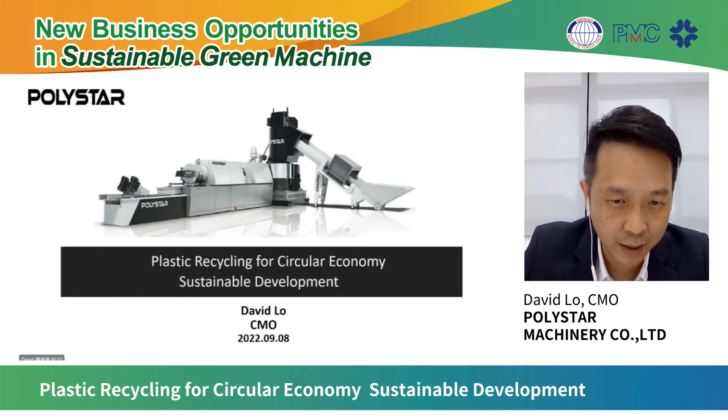Polystar was established in 1988. So far we have 65 employees, and our main products are recycling machines and blow film extrusion lines. So far, we have distributed about 3,200 sets of blow film lines and 1,200 sets of recycling machines. We have distributed to more than 110 countries worldwide.

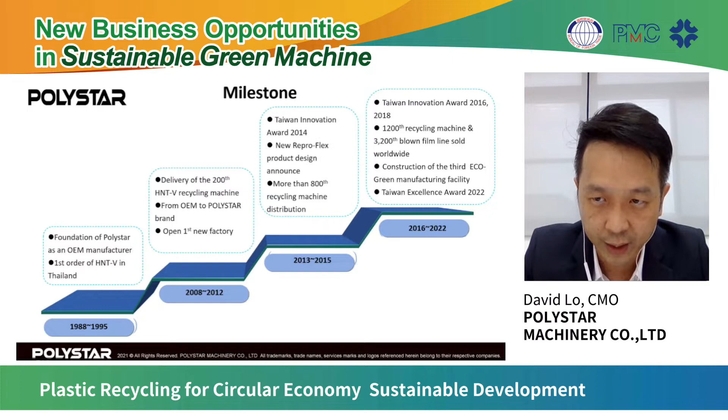From 1988, Polystar was positioned as an OEM manufacturer. From the 2010s, we moved from OEM to Polystar branding company. Until now, we have already developed innovative plastic recycling solutions and blow film extrusion line products. We have constructed our third eco green manufacturing factory in Tainan. In 2022, we even acquired the Taiwan Excellence Award and got affirmation from our global customers.

Today I would like to show some topics, including the green and smart manufacturing of Polystar. Our mission is to make recycling more simple and efficient, using less energy consumption and less operation cost to contribute more value to the circular economy. Our mission is to contribute value to the circular economy chains.

Here I would like to show one video to present how we work in the circular economy chains. Please see our operation video.

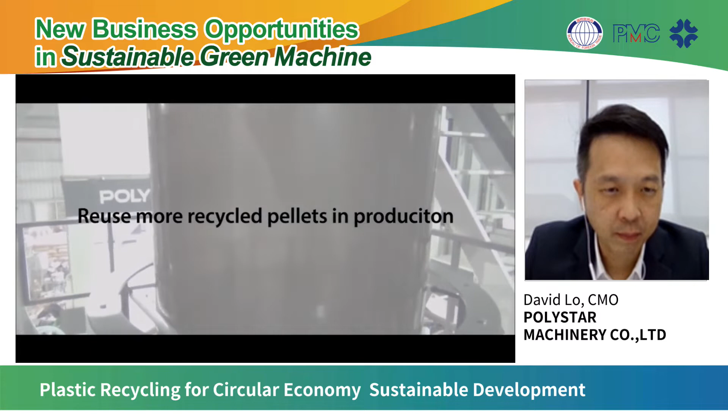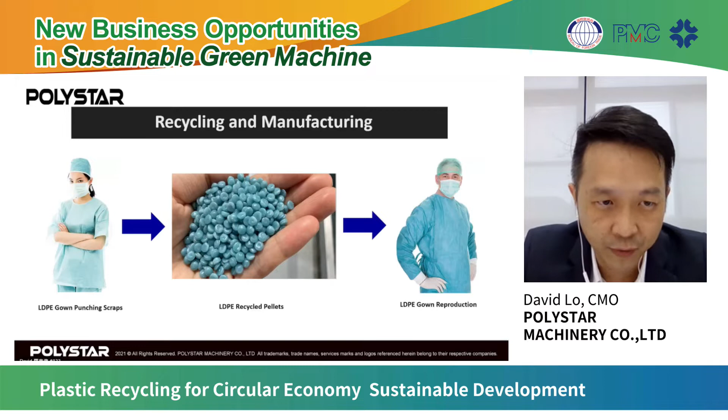The second topic I would like to introduce is about the experience of making medical gowns at Polystar. As you can see, we have experience using LDPE gown punching scrap and also edge trims, fitting them into our recycling machines to produce high quality and stable quality recycled pellets. Then we can reuse them back in the extrusion production line to make LDPE medical gowns or gloves again, contributing practical value for the circular economy. That is the example and successful case study from our Thailand customer.

The third topic I would like to introduce is Polystar's recycling solutions for circular economy. The first one is the recycling machine for post-industrial film recycling. This is the circular economy chain: from the blow film production waste, it goes back to our recycling machines to produce pellets, then back to the blow film extrusion lines. The applicable processing material includes PE and PP film rolls, bags, film scraps, bubble films, and film sheets.

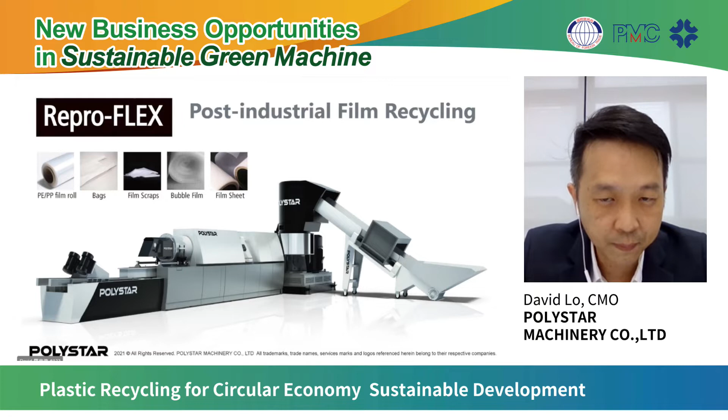This is our Repro-Flex cutter compactor integrated recycling machine. The major process is from material direct feeding to the conveyors, with cutter compacting and densifying process, then going to the extrusion lines for degassing and dual piston filtration systems. Then we utilize water ring pelletizing technology to process high quality recycled pellets. As you can see, in the cutter compactor section we're using intelligent interlock control technology to achieve the smart manufacturing process.

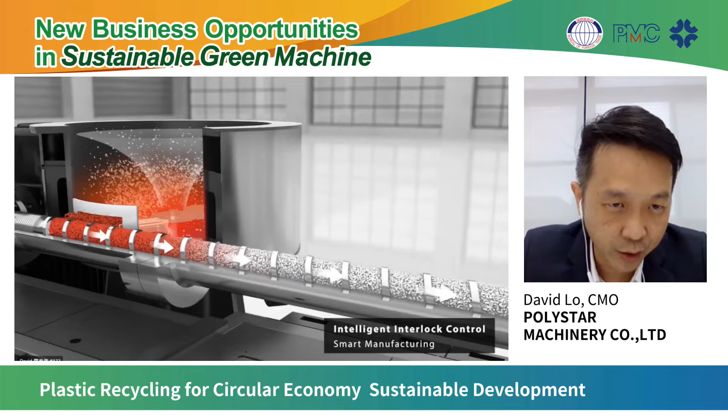This is our advanced pelletizing systems technology. We utilized digital algorithms calculation technology and embedded inverter driving modules to let the pelletizing blade rotate according to the die head pressure. So it can produce very uniform size and stable quality recycled pellets. We got patents in Taiwan for this.

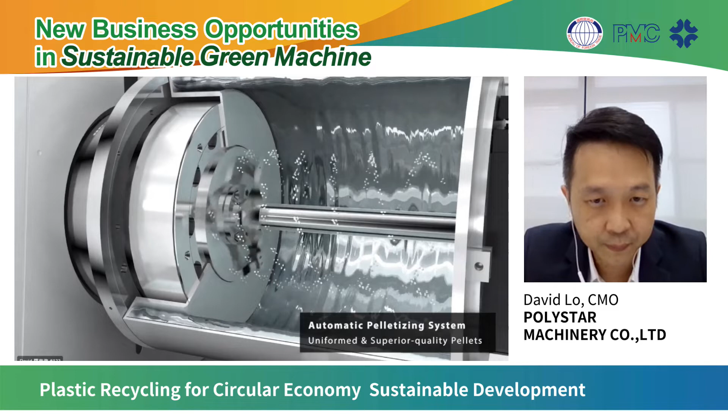The second solution I would like to introduce is another recycling machine for multiple layer lamination and metallized film recycling. That is the circular economy chain for multi-layer film recycling. The process: lamination film waste can go back to our recycling machines to produce pellets, then go back to injection molding or blow molding production machines to produce good quality tables and chairs and other products.

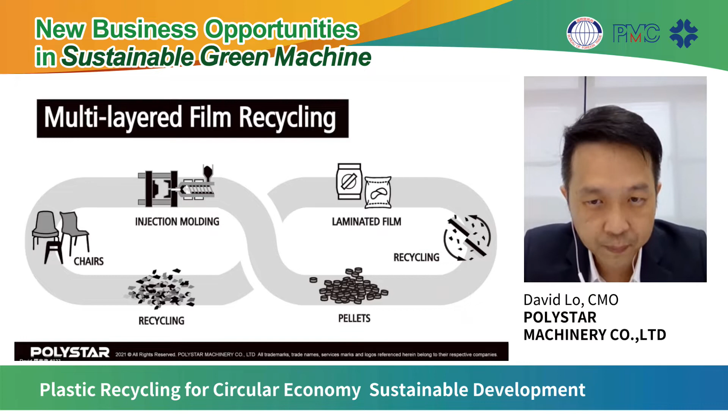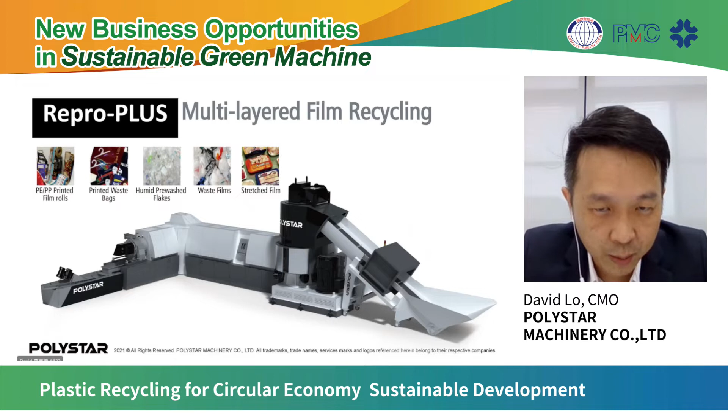This is our Repro Plus recycling machine, able to process printing film rolls, humid pre-wash flakes, stretch films, and lamination films. This is the structure of the Repro Plus recycling machine.

As you can see, there is one more degassing unit in number 5, which is the second degassing system. In number 6, you can see the second filtration system, and we also use water ring pelletizing technology. Through this process, with one more degassing and one more filtration, it can produce stable quality recycled pellets and go back to the production line.

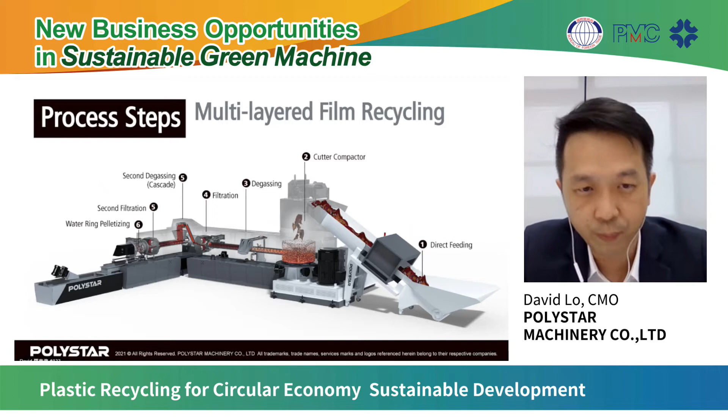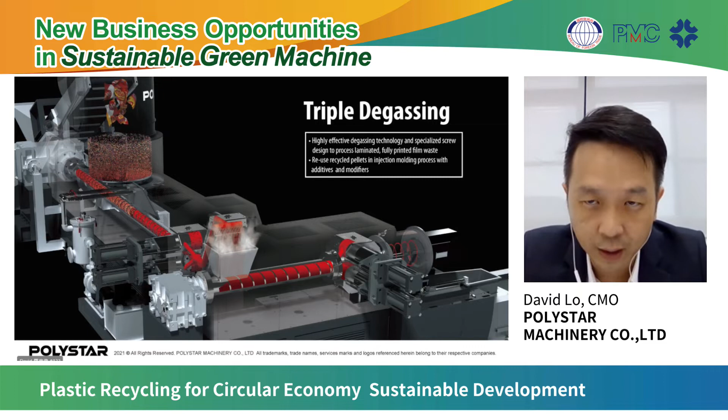That is the schematic drawing of the Repro Plus structure. You can see that with the triple degassing systems and technology, you can remove more humidity and moisture, and the heavy printing comes from the lamination films.

That is the technology system and integration which integrates European automatic melt filters. It is capable of processing post-consumer grades and high contamination grades of waste.

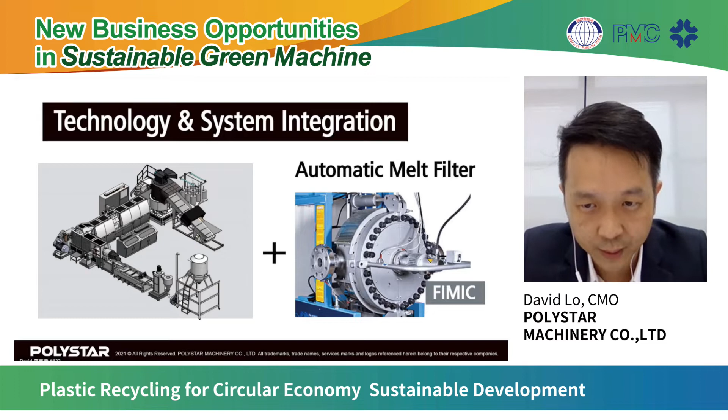That is an example and successful case study from our Sweden customer. Mostly they are processing ABS and PS electronic waste coming from computer cases, refrigerators, and air conditioners, this kind of application. Using this recycling and advanced filtration system, it can process stable recycled pellets and go back to the commercial markets, or back to their own production line.

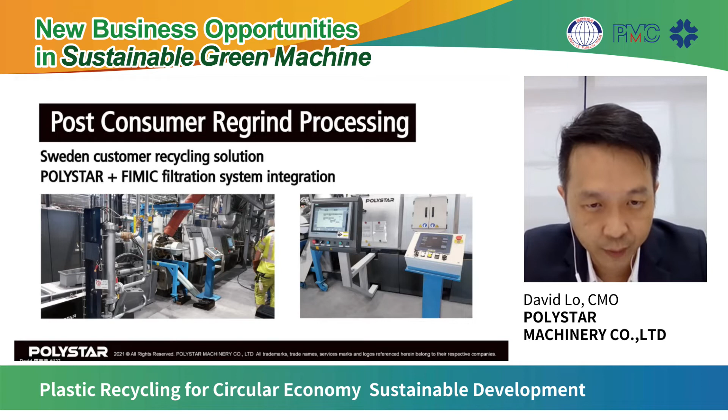The third case I would like to introduce is the solution for PP raffia, tapes, woven sacks, FIBC jumbo bags, this kind of waste recycling.

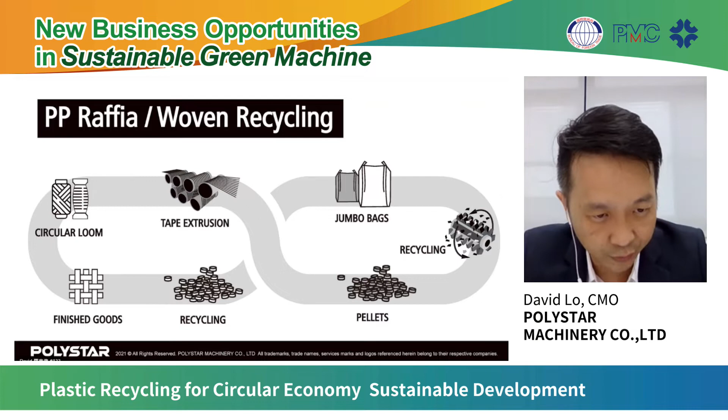Most of the jumbo bags, woven sacks, this kind of rigid structure material can be recycled and go back to the tape and raffia and woven sack, jumbo bag extrusion lines, and go to the circular loom production lines, finishing as goods for the complete circular economy chain.

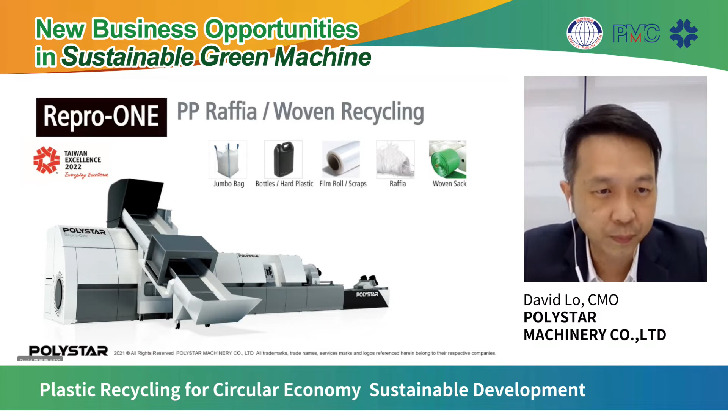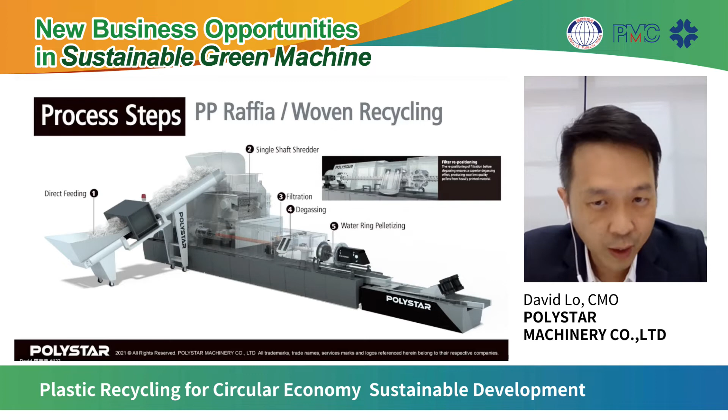You can see on the front side, it is integrated with a single shaft shredder. It can process rigid structure material. We also have a filter before degassing, designed to process heavily printed material.

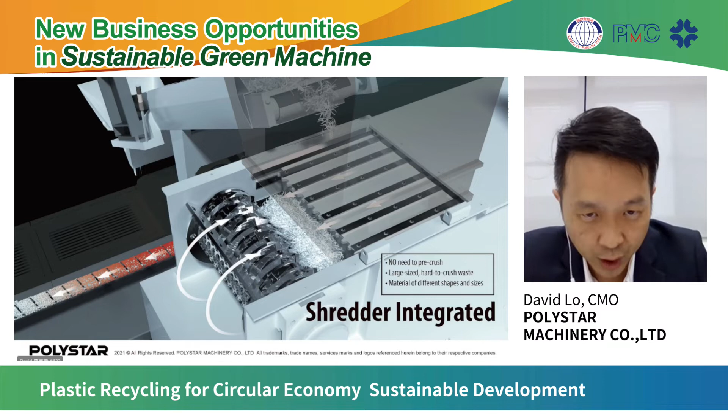We utilize the shredder-integrated recycling solution to be able to process rigid structure material. The benefit for the customer is no need to pre-crush the material in advance, and it's capable of processing large size and hard-to-crush waste.

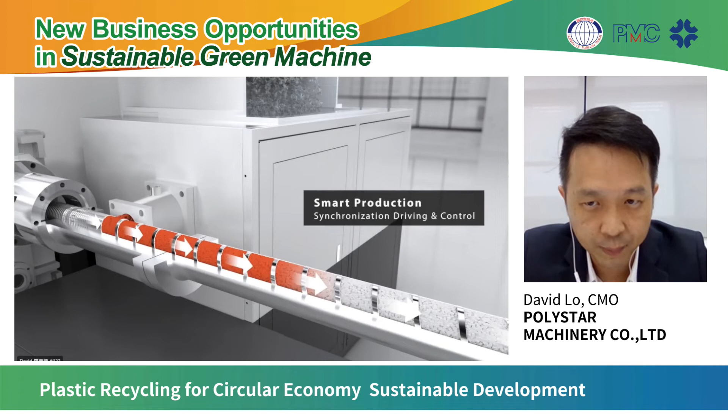For these machines, we utilize synchronization driving and control technology to save power with energy saving consumption, and to achieve a higher automation level to meet smart production criteria.

Last one, I would like to introduce the recycling machine for injection molding or blow molding applications, including shampoo and milk bottles, containers, pallets, rigid pipe, this kind of application.

As you can see, these hopper feeding recycling machines can process crushed granules and HDPE, and also PP milk bottles, including containers and bottles.

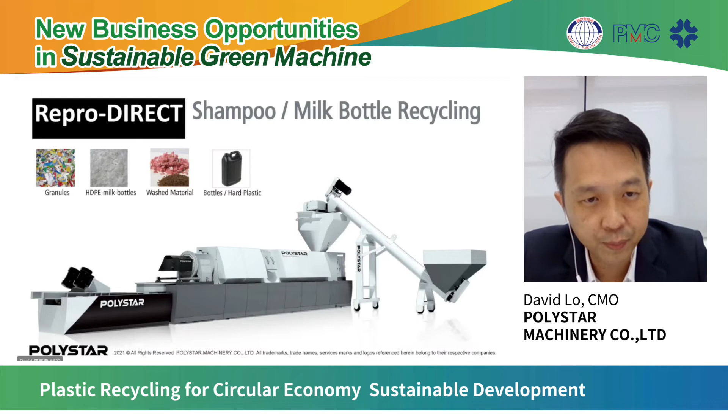The difference with the front three models is it uses a screw conveyor, which is more convenient for feeding the crushed regrind into the hopper. Then when it enters the hopper, we have an embedded smart sensor to optimize and stabilize the feeding. Then it goes to the extrusion system with degassing and filtration process, and into the pelletizing system.

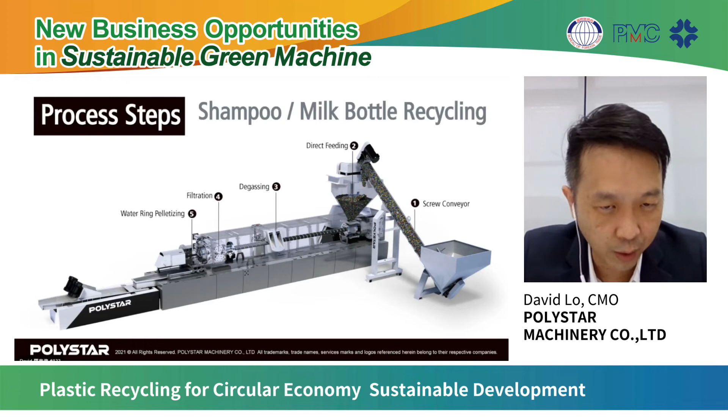For this application, we use direct feeding technology. You can even use a screw feeder or belt conveyor feeding method. We use a level sensor to stabilize the feeding speed control.

Basically, it's a single step process from feeding, extruding, degassing, filtration, and pelletizing. It's all in one process, more simple and highly efficient for the customers.

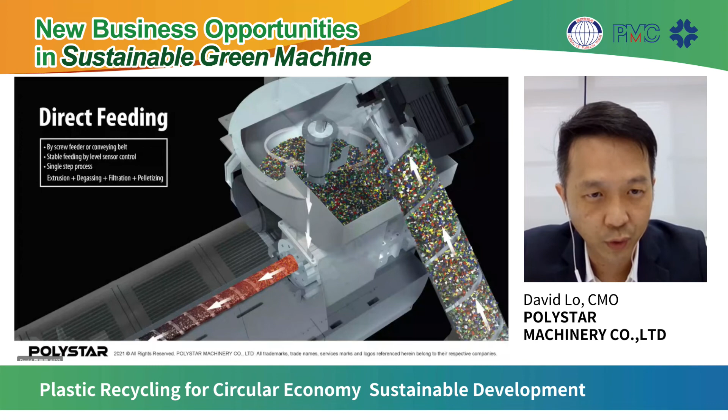Our main core technology for this solution is direct feeding, with smart level sensor control to make the whole recycling process simpler and easier for customer operations.

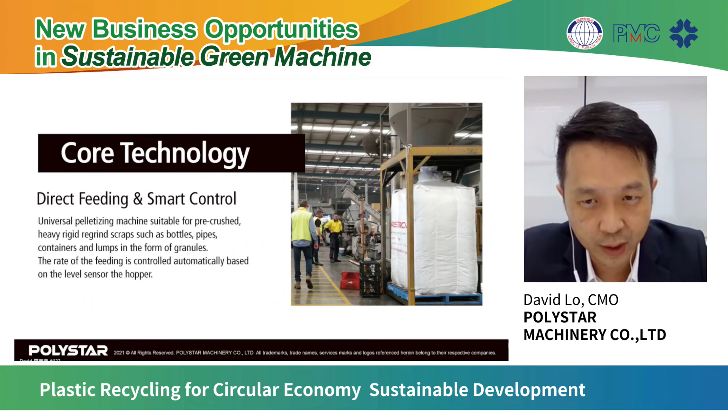It can control automatically based on the level sensor of the hopper, and it can also produce very stable and high quality recycled pellets.

Regarding the electrical control systems, except for the standard platform, the customer can also upgrade to the intelligent PLC control system. Our PLC control system is embedded with a user-friendly HMI, and also embedded with a cloud IP-based module, which can be used for long distance remote installation, troubleshooting, and education.

Another function includes 24-hour automatic machine preheating mechanisms, and also energy saving sleep modes, which can save power for the whole machinery.

It also includes big data collection, analysis, and parameter optimization. The other function includes abnormal warning notifications to avoid trouble or damage to the machine in advance.

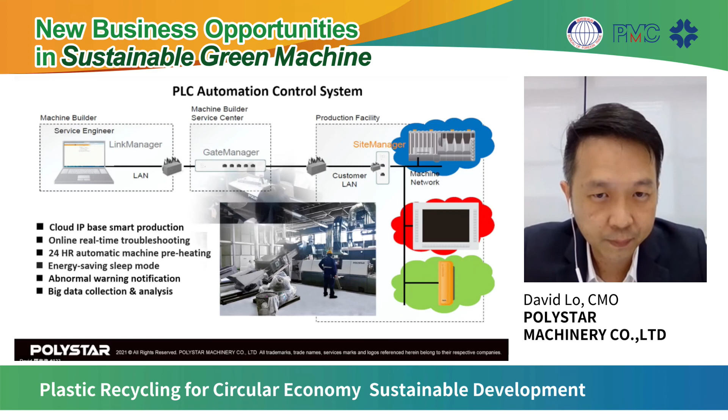Regarding ESG developments, Polystar is also focused and devotes many resources to ESG development, from the engineering stage, manufacturing stage, and also testing, fine-tuning, and incorporating customer feedback for systems and design improvements. We hope to contribute to the entire and complete circular economy circle to support sustainable ESG developments.

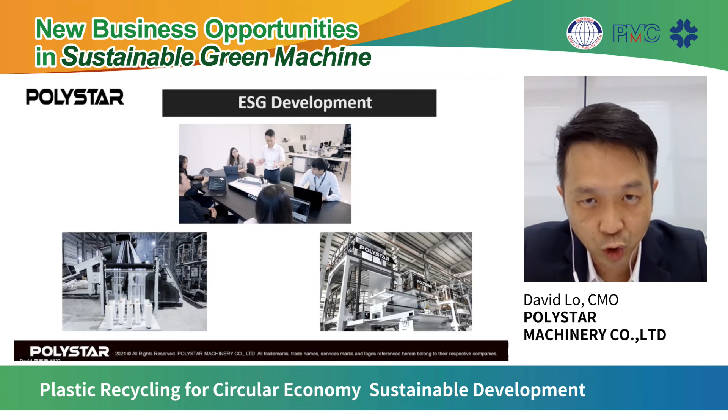Our final goal is to have a complete and green recycling process. We hope customers can make this effort to make the recycling process easier and simpler, and ultimately we hope to purify the Earth's environment and achieve sustainable development.